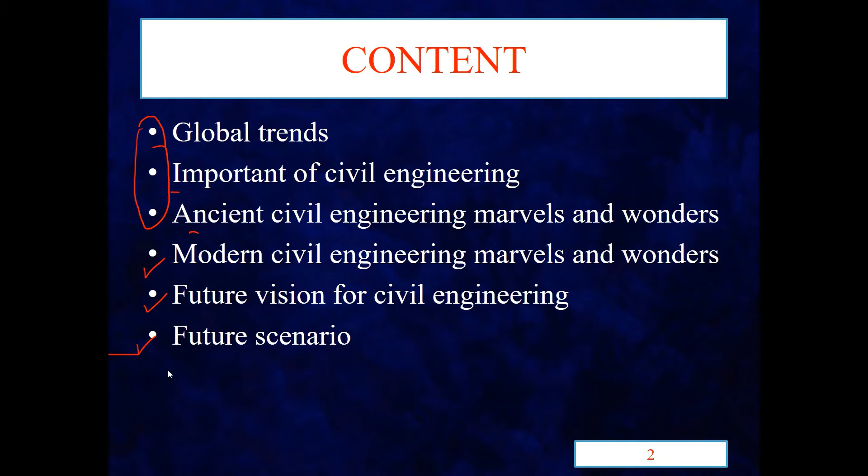Shall we start? Modern civil engineering marvels include so many structures that we consider as modern marvels, like Palm Island, Burj Khalifa, Panama Canal, Hoover Dam, Statue of Unity, Three Gorges Dam, Channel Tunnel, and the Signature Bridge of India. We will discuss each of these structures briefly.

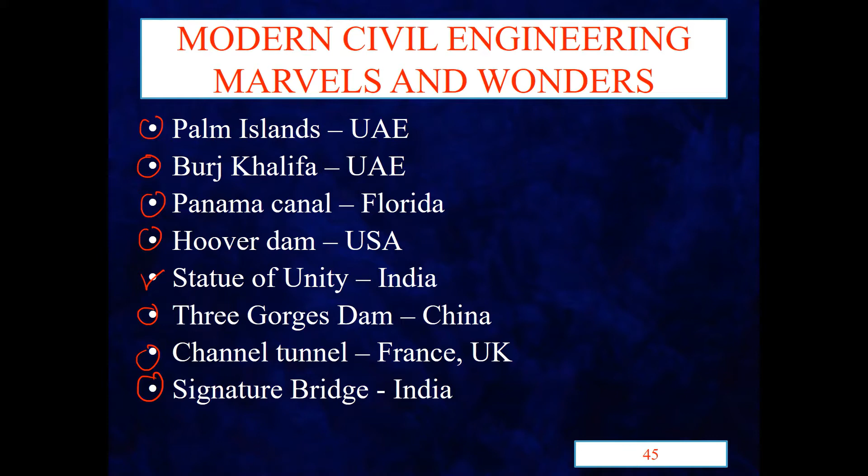Here is Palm Island in Dubai, United Arab Emirates. Dubai is a city in UAE. It has the shape of a palm tree, and we have three islands: Palm Jumeirah, Palm Jebel Ali, and Palm Deira. On Palm Island, we have hotels, villas, apartments, buildings, beaches, and restaurants.

Why did we build this Palm Island? Simple - imagine Dubai has a limited coastline. Dubai, UAE, is a small country with just a limited coastline, only 72 kilometers. So to improve and increase the length of the coastline, they created this type of Palm Island.

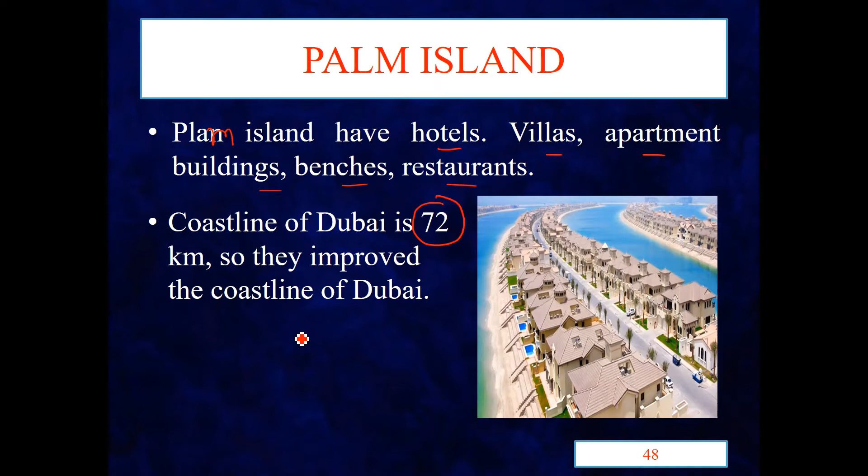Palm Island was planned by Sheikh Mohammed, and construction happened in three phases. First, construction of the breakwater. Second, construction of the Palm Island. Third, infrastructure development on the Palm Island.

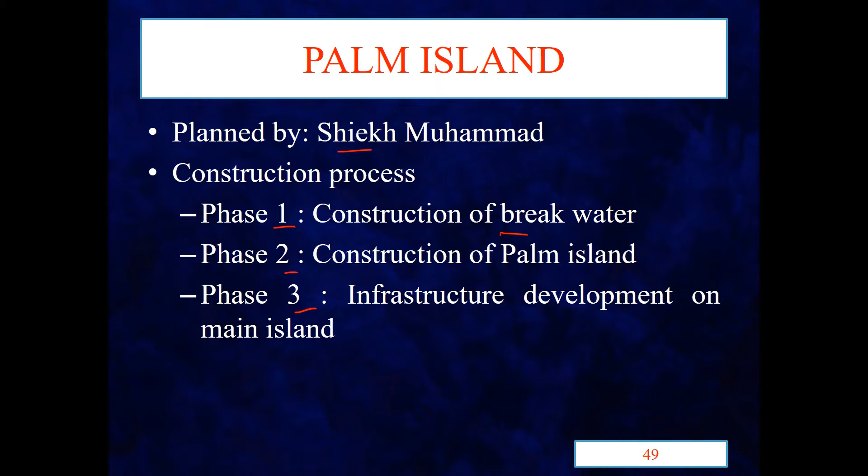What does construction of breakwater mean? Here you can see this is called the breakwater. So in the first phase, they construct the breakwater. After that, they construct the Palm Island, and on the Palm Island, they develop infrastructure.

The next one is Burj Khalifa. Its location is Dubai, also in United Arab Emirates. Its height is around 829.8 meters tall - the tallest. Construction started in 2004, finished in 2009, and it opened in 2010.

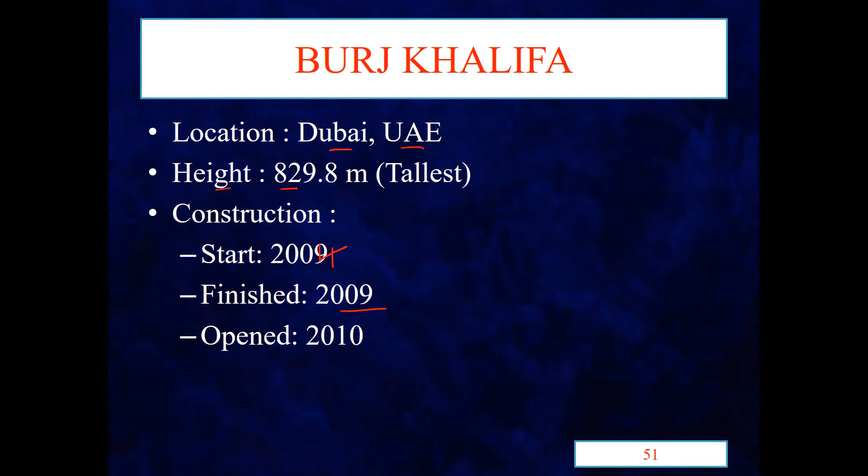It is designed as the centerpiece of a large scale mixed-use development. Why mixed? Because we use reinforced concrete, steel concrete, as well as aluminium. So it's a mixed-use development. It's designed by Adrian Smith, a structural designer, who worked at Skidmore, Owings and Merrill - that's the firm name.

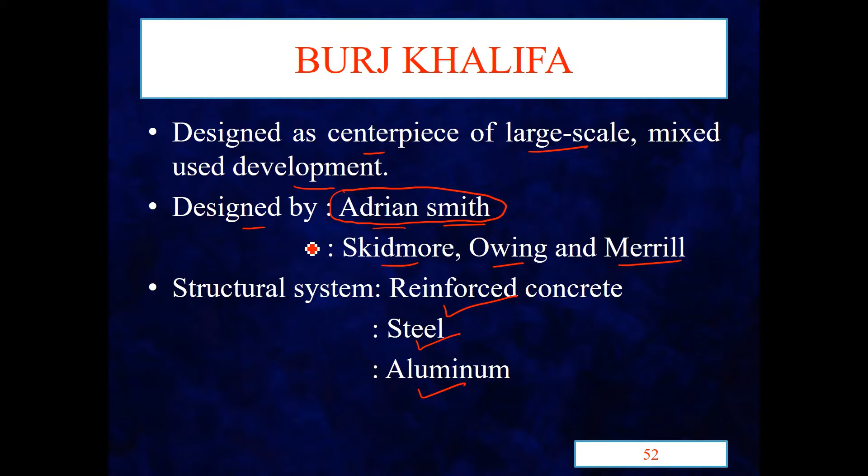The Caribbean Sea and Pacific Ocean are connected, and the Atlantic Ocean and Pacific Ocean are connected. It is managed by the Panama Canal Authority.

Before the canal was opened, ships had to travel around the southern tip of South America to get to the Pacific Ocean. The Panama Canal shortened that journey by about 11,000 kilometers, which reduces fuel use.

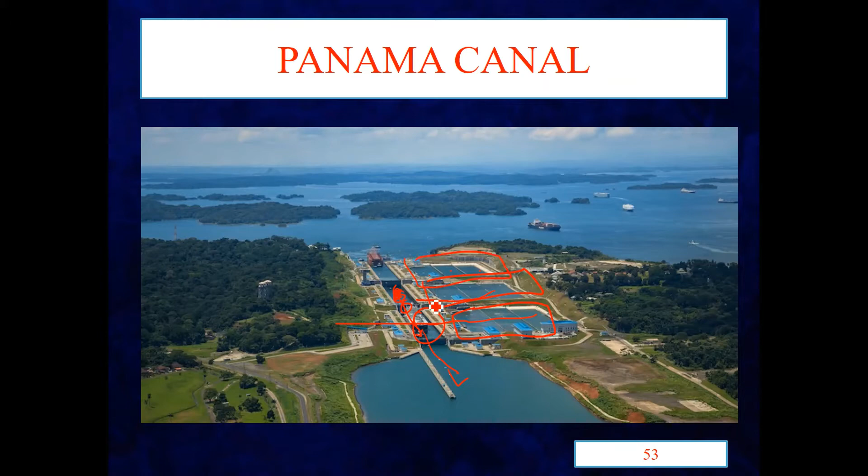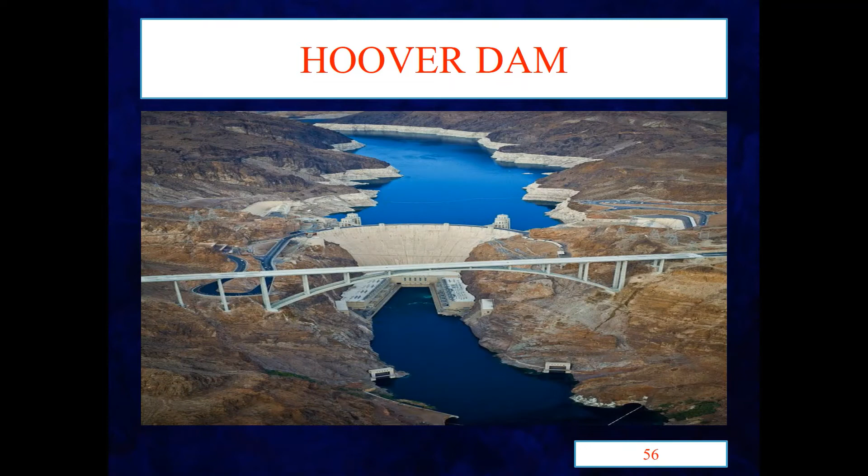Next one is Hoover Dam. You can see here Hoover Dam with a bridge. This Hoover Dam location is on the Nevada, Arizona border in USA. Construction started in 1931 and finished in 1936 on the Colorado River.

It's an Arch Gravity Dam and a lake is created, called Lake Mead. The aim of constructing Hoover Dam is to supply drinking and irrigation water to the American Southwest.

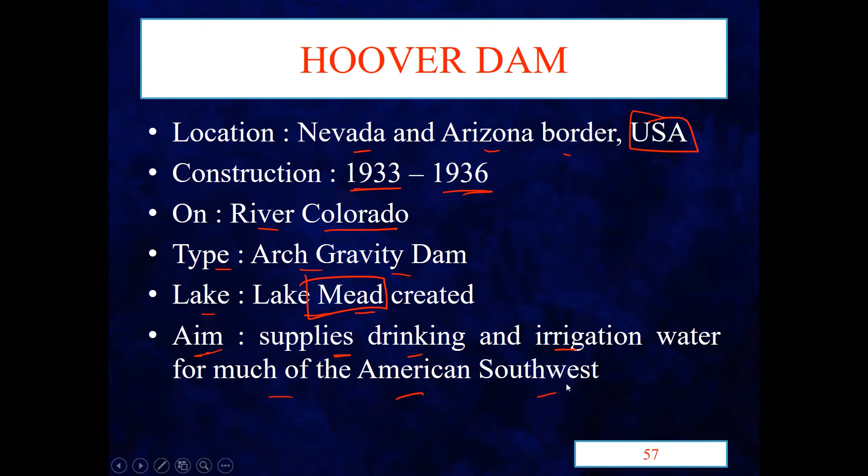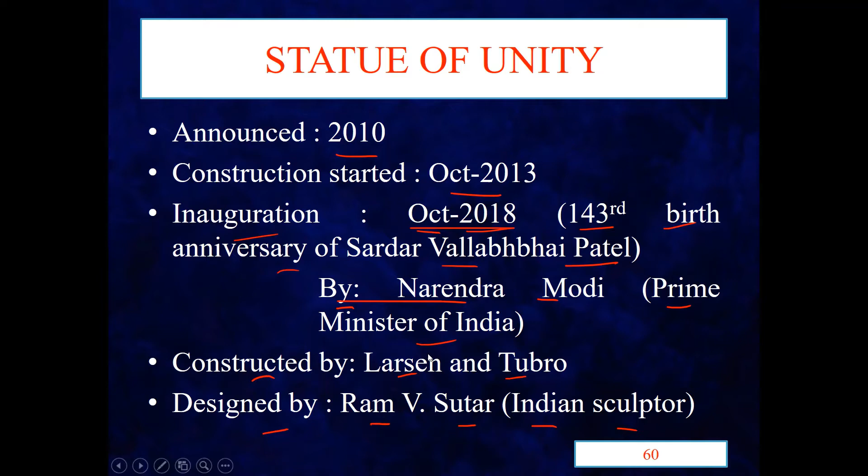We have two high-speed passenger elevators, and the vertical cores support space frames with bronze panels. We provide a viewing gallery at 153 meters at chest level. You can see here is the viewing gallery.

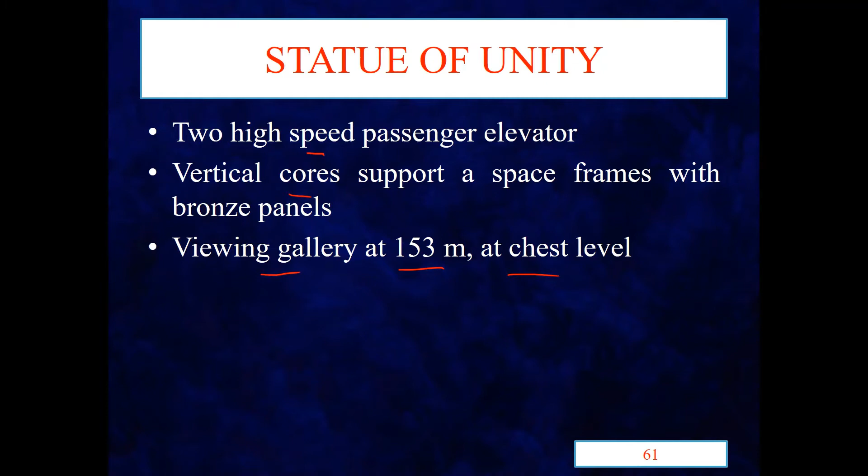The design is divided into 5 zones: Zone 1, 2, 3, 4 and 5. Zone 1 is the memorial garden and museum. Zone 2 is the statue sites.

Zone 3 extends up to the viewing gallery. Zone 4 is the maintenance area. Zone 5 is the head and shoulder of the statue.

Zones 1, 2 and 3 are open for visitors, but Zones 4 and 5 are not open for visitors - these are used for maintenance.

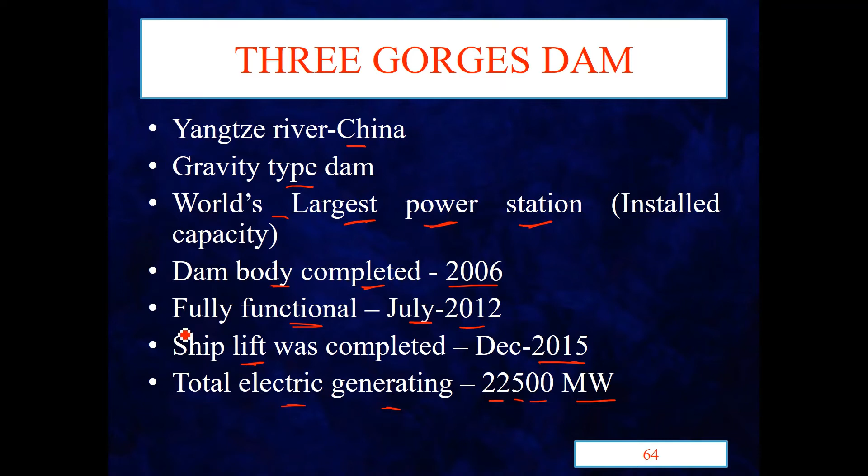The ship lift was completed in December 2015, with total electric generating capacity of 22500 megawatts. We have a ship lift at Three Gorges Dam. At this portion, at this side, you can see it is used for travel shipping, as a waterway for ships.

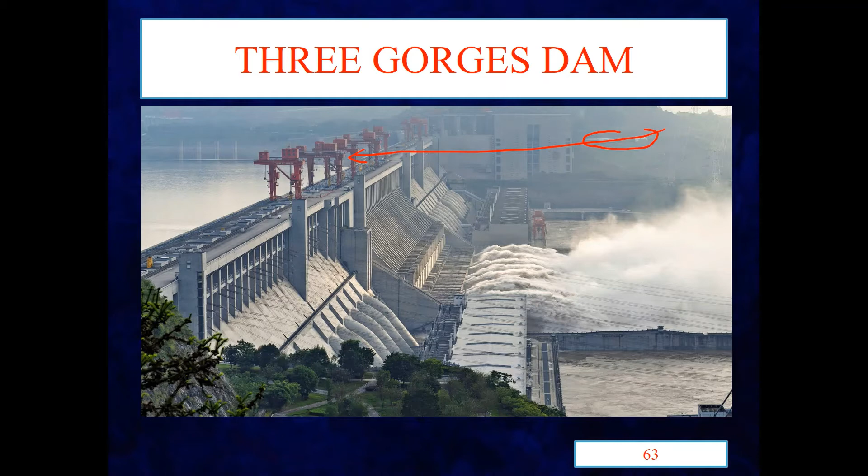Three Gorges Dam height is 181 meters, length is 2335 meters, width is 40 meters, and 115 meters at the base bottom.

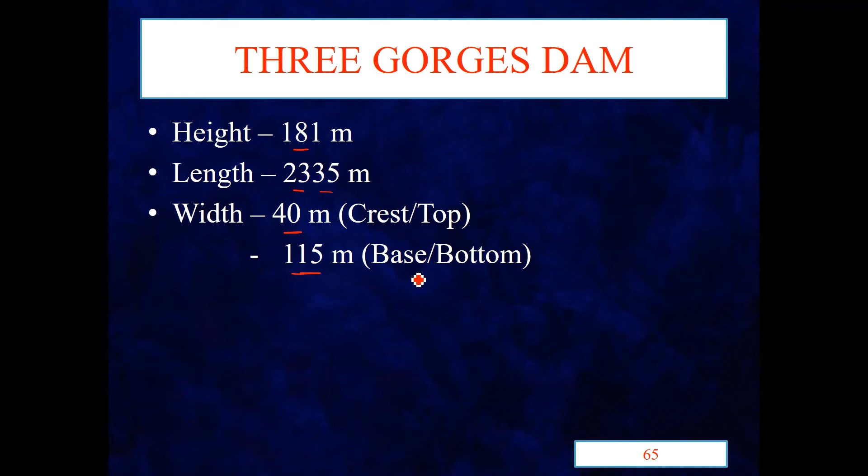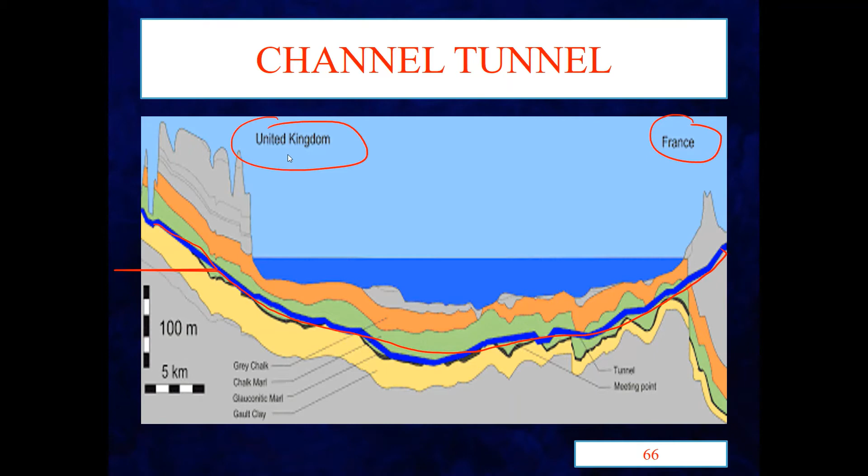Next one is the Channel Tunnel. Here the blue line you can see is the tunnel. It's a tunnel connecting France and United Kingdom at the English Channel.

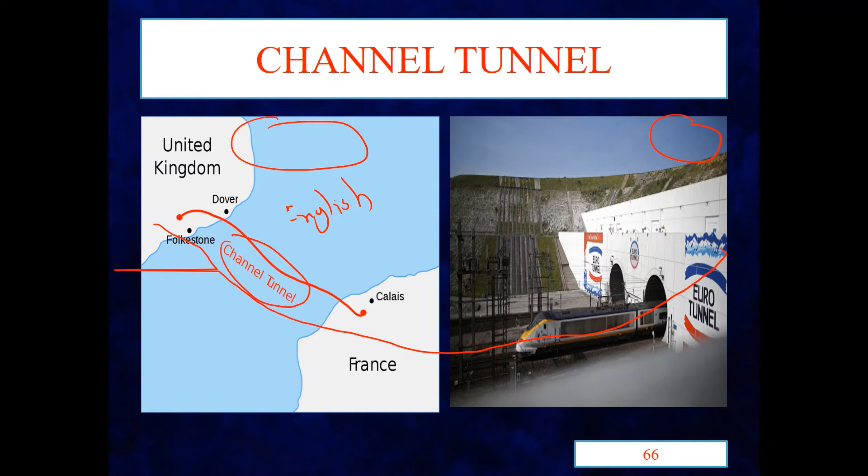It connects England and France - England's Kent city and France's Calais are connected. It carries the high-speed Eurostar passenger train, with a speed limit of 160 km per hour.

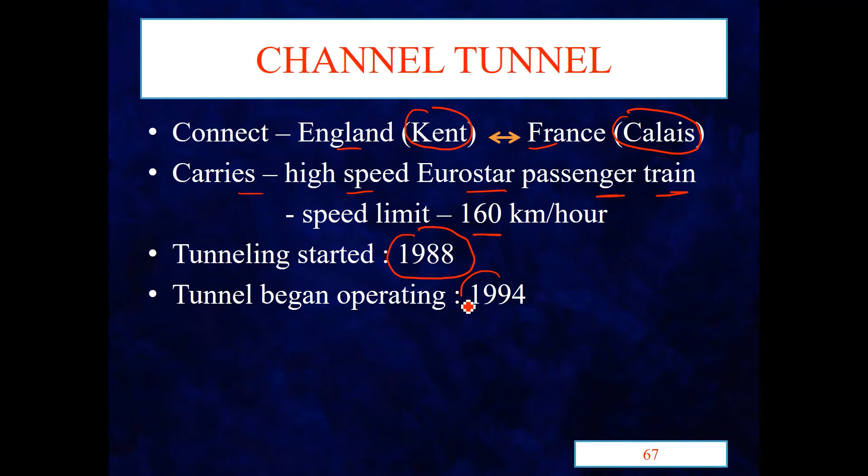Tunneling started in 1988 and the tunnel began operating in 1994. The dimension of the Channel Tunnel: 7.6 meter diameter. We have two numbers of channel tunnels, 7.6 meter diameter, 30 meters apart.

The distance between the two tunnels is 30 meters apart, and the length is 50 kilometers. There is also a 4.8 meter diameter service tunnel between the two main tunnels, which is the third tunnel used for service.

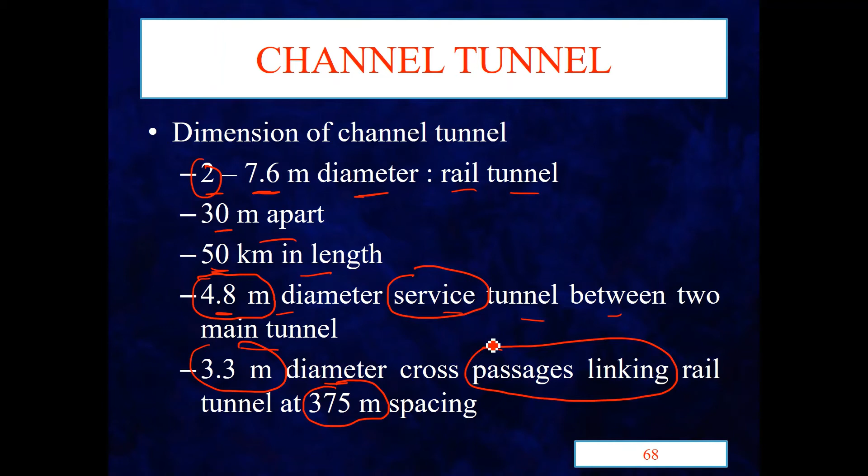There is also a 3.3 meter diameter cross passages linking rail tunnel, spaced 375 meters apart. We used 11 boring machines working from both the English and French side, and construction was privately funded by Paramount, the firm that funded this channel tunnel.

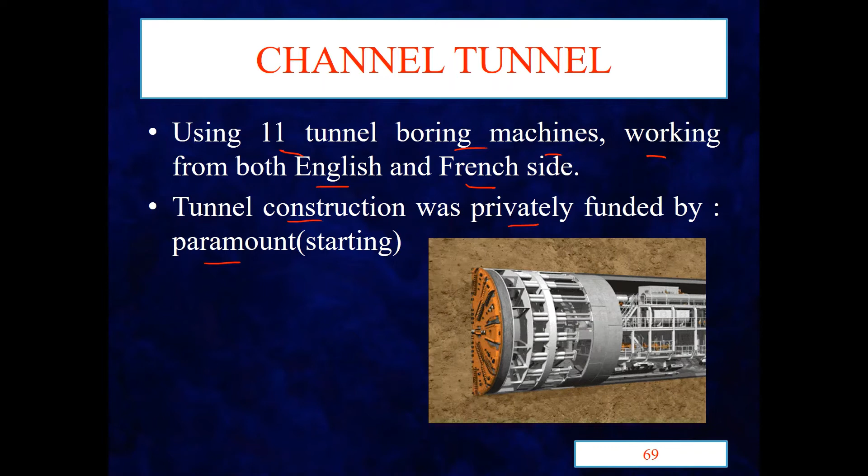Next one is Signature Bridge. You can see here is Signature Bridge. This is a night view of Signature Bridge.

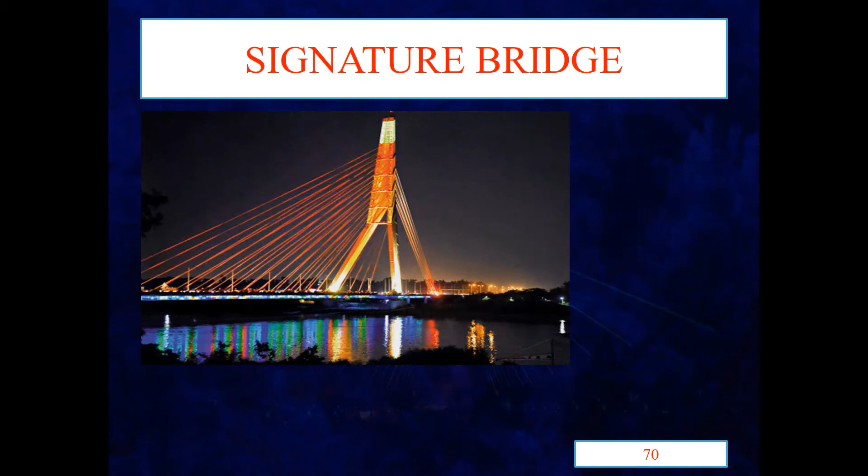Signature Bridge is a type of cantilever spar cable-stayed bridge on the Yamuna River, at Wazirabad, connecting Wazirabad and East Delhi. The bridge shortens the travel time between north and northeast Delhi.

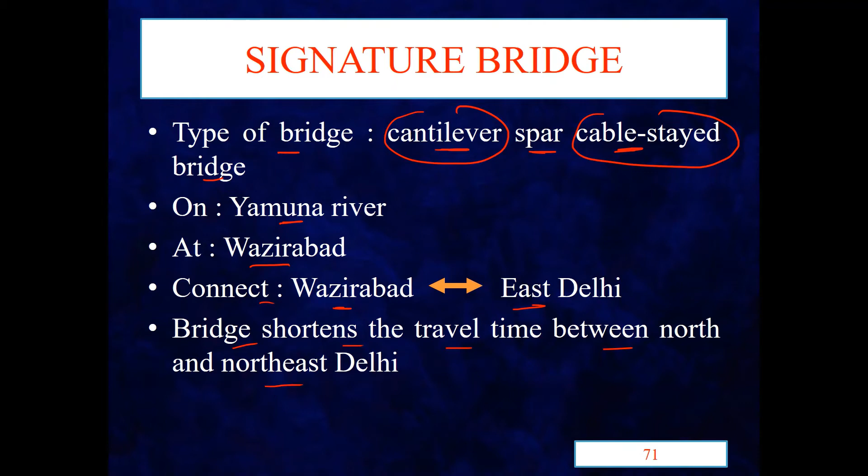The dimensions: the length of the project is 6 kilometers. The total length of the bridge is 675 meters, as shown in the figure here.

So total length of bridge is 675 meter, and main span is 251 meter. Here it's the main span which is 251 meter. And height of pylon is 165 meter above ground level.

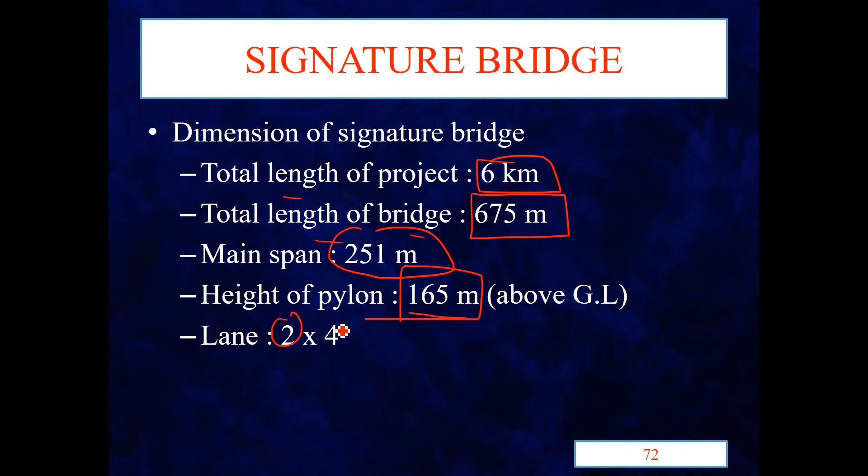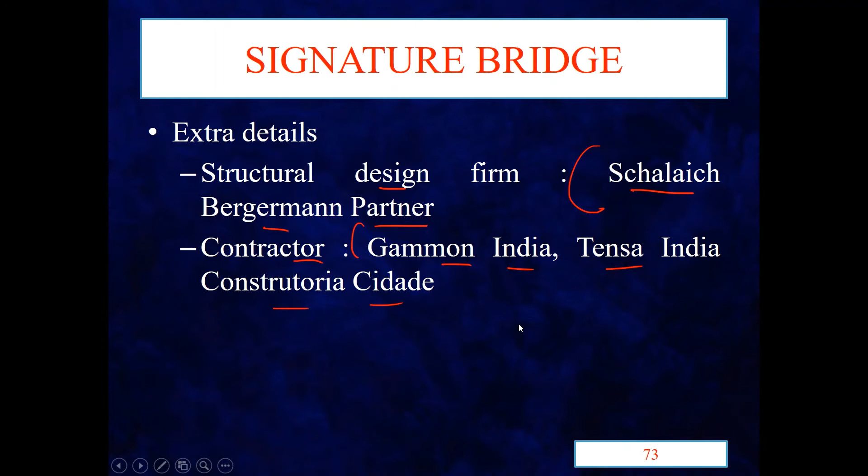We have a 2 by 4 lane. Extra details: structure designed by Schlaich Bergermann Partner, constructed by Gammon India, Tensa India, Construtoria Cidade. These are the firms which did structure design, and these are the firms which did construction. You don't have to remember this extra detail, I just provide it. Here you can see this figure, why this cantilever. You can see there is only one pylon, and it's cable stayed.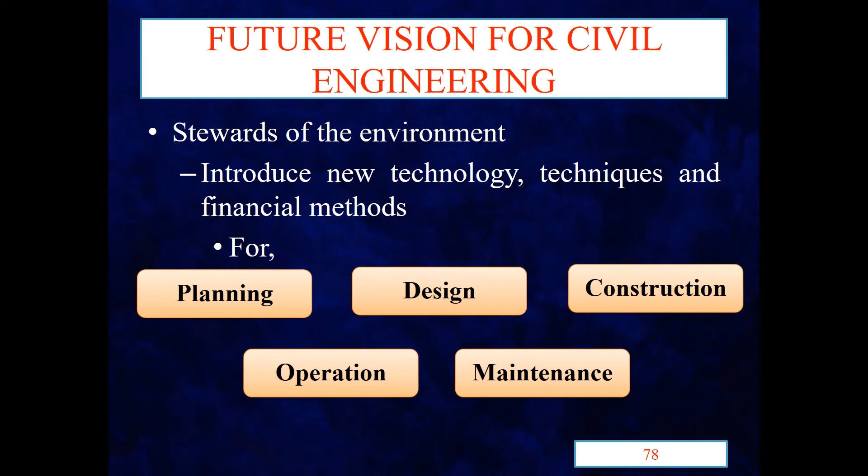Then the next is innovators and integrators of technology. Technology promotes faster application of new approaches. Multinational knowledge means we have to know about what happened in the US, what new technology or technique they use for construction, and can we use this technology in our country, and if we use it, how we can implement it. This is the innovators. And integrators means compiling this - if we know something from the USA, if we know another country is using this new technology for construction, we can use this technology in our country.

Then after, managers of risk. New technique for reducing incidence and effect of natural and man-made disasters. We use new technology to manage the risk, to reduce the risk from natural and man-made disasters. By using new technology, we can reduce the damages by natural disaster as well as man-made disaster. So this type of new technology we can use in the construction field. And as a civil engineer, we have to develop infrastructure.

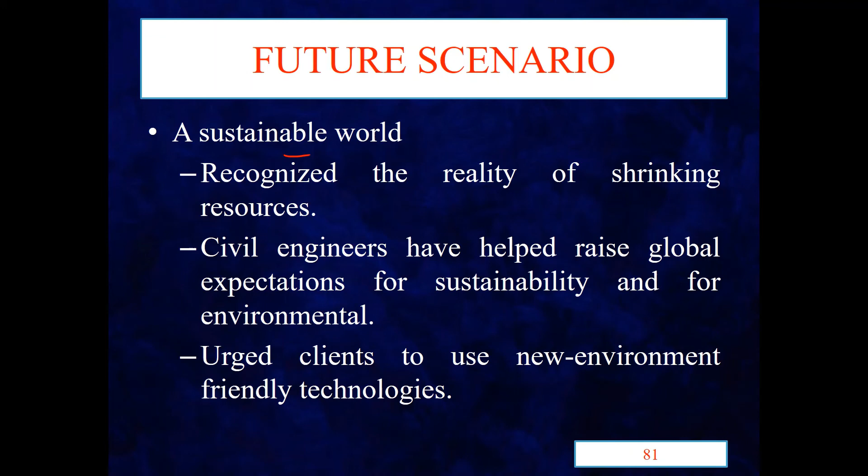Why do we require global attention for sustainability? So first is growing population. First problem, population is increasing. Shrinking resources, resource shrinkage, we discussed it. Then there's climate change. As an effect, you can see the climate changing at every single bit of your life. You can see where the rains are not falling and we see rains where they weren't before.

Okay, maximum raining area will be drought. We can see the droughts are there. It will be climate change. Then after, sea level rise, we discuss it. Sea level rising will affect and increase storm activity. So these are the problems, and we have to find a solution for this. This problem will grow, and the future will be affected more.

Now, demand increasing for sustainable energy. Use the alternative fuels and use wind, solar, waves and geothermal energy. For demand, if energy demand is increasing, so what do we have? Alternative fuel. We have to find alternative fuels. Which ones? Wind, solar, waves, geothermal energies.

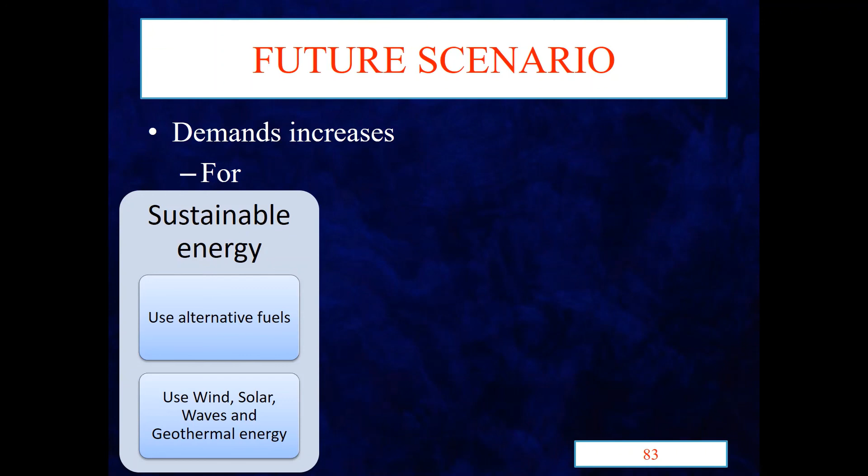We require fresh water, improve water purification methods and desalination technologies, and use closed loop systems, meaning use one water, then recycle it and use it again, recycle it again, use it again. Use closed loop system. Safe waste disposal, recycling and reuse. This will be the future scenario.

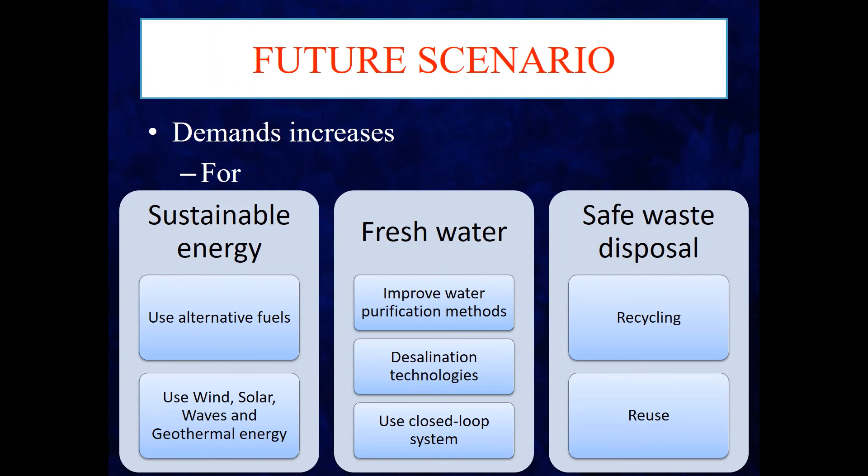Research and development: interdisciplinary, cross-disciplinary and multidisciplinary collaboration in basic research, needed at national and global level. We have to do research in an interdisciplinary manner, cross-disciplinary manner, multidisciplinary manner, with collaboration at national and global level.

So we can research by interdisciplinary means, state to state. Cross-disciplinary means changing state, and multidisciplinary means all different two or more state nations. Focus on the fast track development and development of technologies.

Managing risks in 2025: high risk of natural disaster and act of terrorism. These are the maximum risks in 2025.

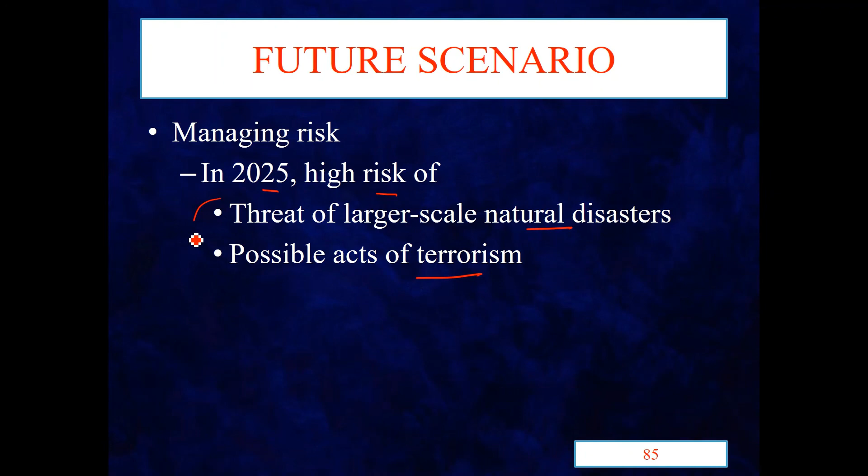Master innovation and integration. Civil engineers are the leaders who help develop and implement new technologies to create appropriate competitive advantages, adapting new technologies into both design and construction.

Okay, here is a practice question. Explain channel tunnel. Write a brief note about future vision for civil engineering.